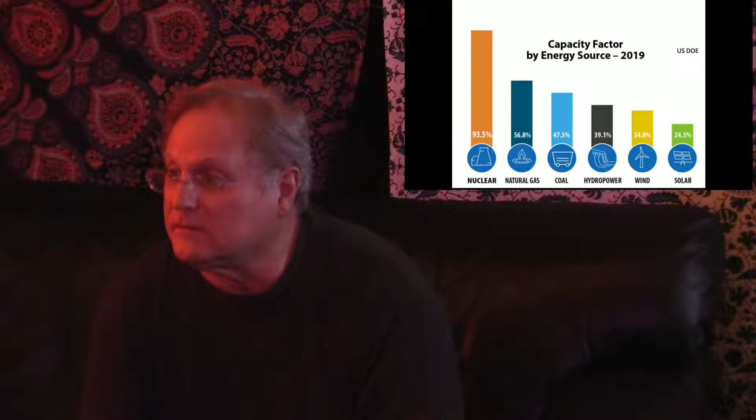So you mentioned there's only one storage dam. Is there technology to convert other dams to storage dams?

No, see, the thing is, you can't really stop the flow of the Columbia River. It's too important for many things—fish being one thing, transportation, irrigation, flood control. You really can't adjust the water behind the dams very much at all, or you mess up the whole system.

Now if you have a drought, now you're in trouble because now you don't have enough water, both to keep the temperature of the water cool enough for most of the fish up here, but also you're now suddenly not able to generate as much power during a drought. So now I'll get to why this is a problem.

Now, capacity factor is kind of bizarre. When you build a 100 megawatt wind farm, that's called the capacity. It means that when the wind is blowing between 35 and 40 miles an hour, you're getting 100 megawatts out of that wind farm. When the wind drops off, though, you're not. Or if it goes higher than that, they shut down for safety reasons.

So the capacity factor is simply the average over which that unit is producing what it's supposed to produce. In terms of the 7,100 megawatts of wind we have here, the wind actually is worse than that. The capacity factor is the annual percent of the maximum output possible. In Washington State, wind turbines only produce about 27% of the time—it's not very good.

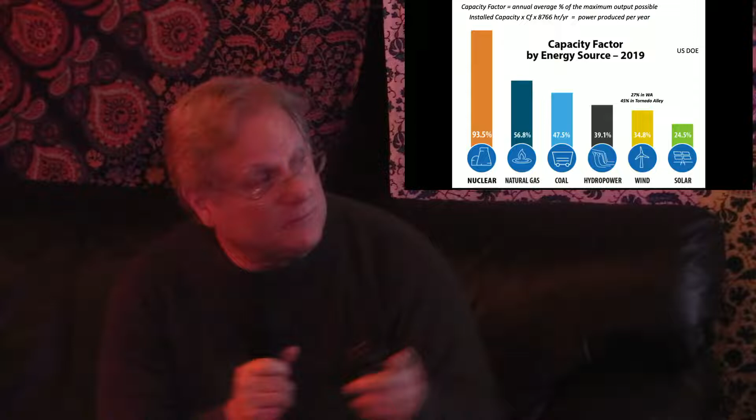In Tornado Alley, it's called Tornado Alley for a reason—even birds don't like to migrate through it because the wind is blowing all the time. So the capacity factor of the same wind turbines produces a lot more energy there.

So again, it's important to put these units in areas where they produce the most energy, so you get the biggest bang for the buck, the biggest bang for the tons of steel you're using. So you need to maximize this. You just can't put them in Washington State because you're getting a subsidy, which is the only reason why they're in Washington State. It matters where you put this.

So again, nuclear runs pretty much all the time—you only have to refuel once every 2 years. Natural gas only about 60% of the time because it is too expensive to run it more than that. Everyone says how cheap gas is, but it is not unless you run it the optimal amount of time. Coal only about 50% of the time because you're refueling all the time.

Hydropower, we only get about 40% of what it's supposed to produce because the water is used for so many things—fish, transportation, flood control, irrigation, recreation—not just to produce power. So we only use it about 40% of the time for power, and then wind and solar.

So if you want to find out what a unit is going to produce per year, you take the installed capacity—say 100 megawatts of wind—times the capacity factor, times 8,766 hours in a year, and that's how much power you're going to produce. No more, no less. Unless something really goes bad, that's what you're going to produce.

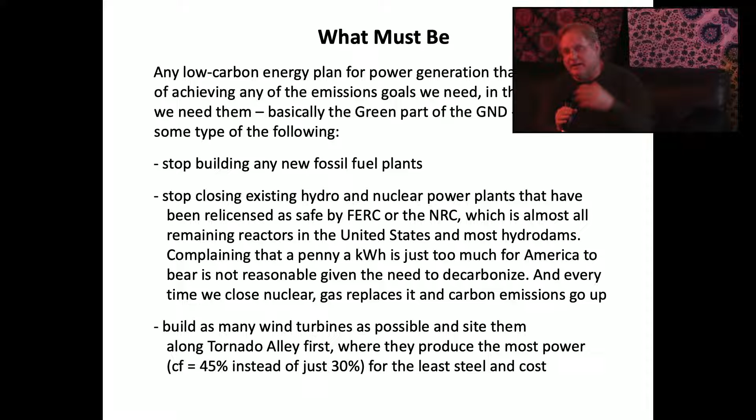Stop closing existing hydro and nuclear plants that are deemed safe by the regulatory agencies. That's why we have regulatory agencies - EPA, NRC, and FERC, the Federal Energy Regulatory Commission, which monitors dams. They actually look at the concrete. They shut down Priest Rapids Dam near me a few years ago because they found a crack in the concrete - sorry, you've got to fix that, we're not going to let you keep running.

Many other countries don't do that. They wait till the dam fails and wipes out whole villages downstream, and that has happened many times and continues to happen. So stop closing those. We don't have the luxury of closing perfectly good, safe working units and thinking you're going to actually displace sufficient fossil fuel to do anything.

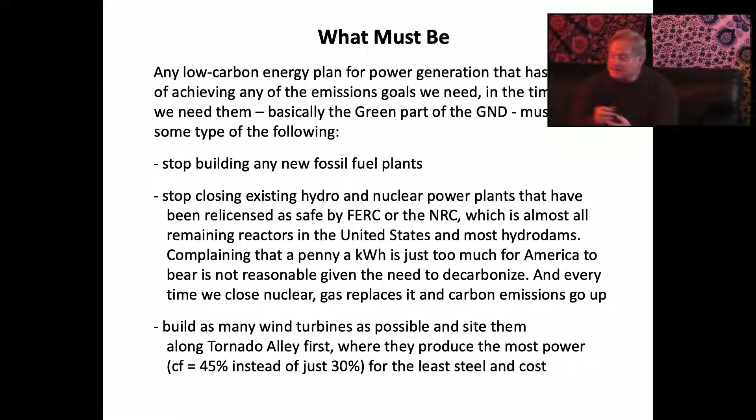And then you can use high voltage transmission lines - we do that all the time - to move it out to where it needs to be. The same thing with solar.

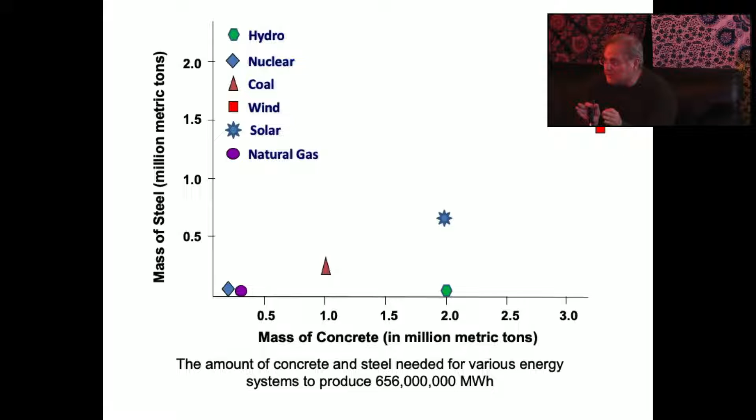This is the amount of material needed, normalized to an output. The amount of concrete and steel - concrete is the x-axis, steel in millions of metric tons is the vertical axis - needed for each of these sources to produce the same amount of energy. This is a big difference here.

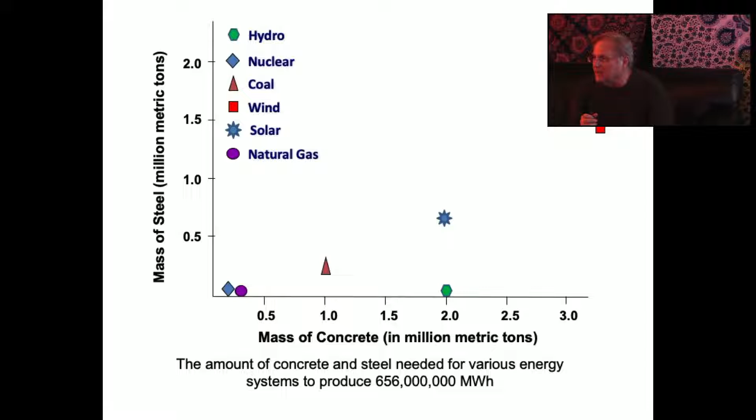That's why nuclear and gas just don't take anything. Gas, because it really literally doesn't take much to build a gas plant - you can throw it up in a year. Nuclear just runs so long, so you don't need to keep redoing it every 20 or 30 years. And of course, wind takes the most steel and the most concrete. Hydro takes a lot of concrete, but not much steel. Solar takes both. Even coal takes much more.

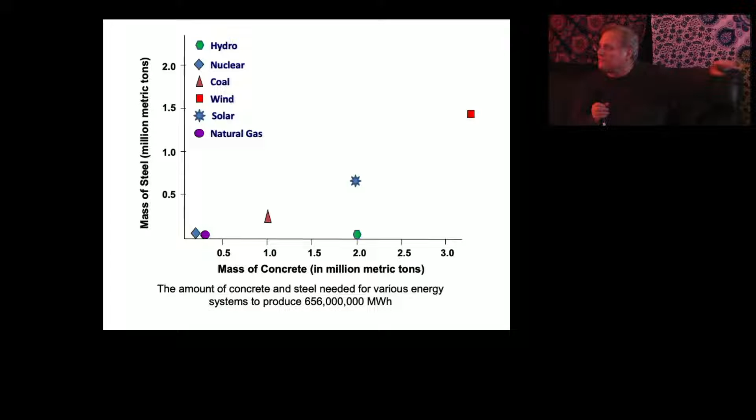So if you're going to put that much steel and concrete on the ground, you better get the most energy from it that you can, and not displace something like hydro.

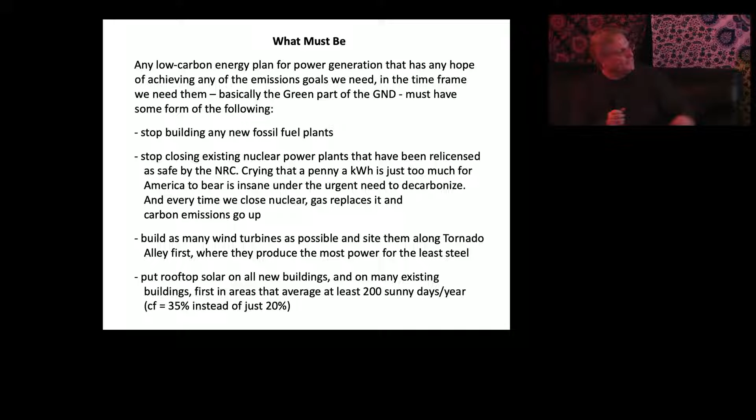And again, first in places that have at least 200 sunny days a year, not Maine. You want to put it where it's red, or at least orange. You can get away with yellow, but my solar panels don't make much here - they're 10% capacity factor. Now, if you can follow the sun like the big solar farms do, you can get that up to 20-25%. But you want to put it down in Arizona and New Mexico where you can get 35%, 40%. Of course, right? Is this a difficult concept?

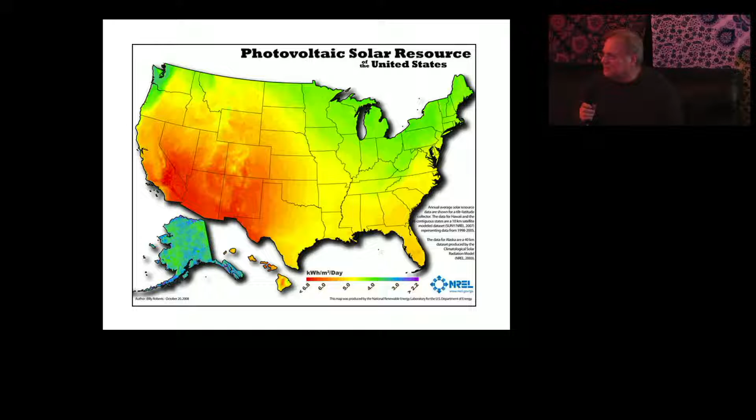No, it's not. Okay, so now small modular reactors, they're designed to load follow wind and solar. They were designed right from the beginning. And the nice thing, we have not been idle in the last 30 years. These designs are pretty good. And again, China just brought on 2 of those online. They can't melt down. I can't believe it took us this long to figure out that size matters. When you shrink the core, the surface area to volume ratio changes enough that you cannot melt down. You can bleed off heat faster than it can build up. Kind of simple. Don't know why it took us this long.

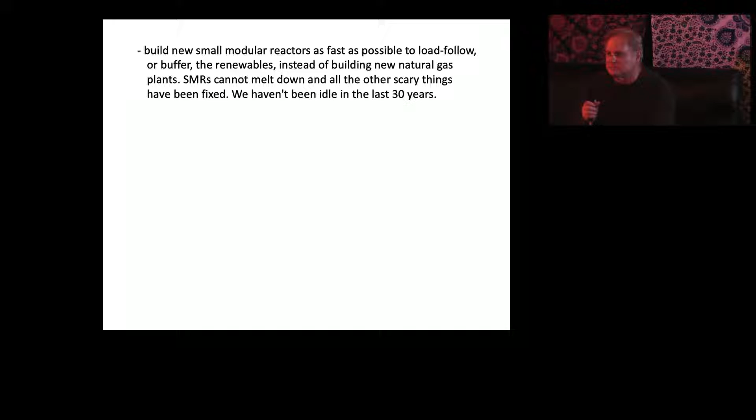Well, it didn't take it this long, because our nuclear navy does exactly this. The nuclear navy is the original small modular reactors. Every submarine we have is nuclear powered, and every aircraft carrier we have is nuclear powered. They're 1 or 2 modular systems sitting right next to each other. And we have had millions of nuclear navy personnel work on these. Never been a problem. Russia had some problems - why should I be surprised?

So there are 3 designs that are probably going to be built in Washington State, but certainly various places. X-energy's Xe-100 is a modular pebble bed reactor. It's going to be built out near where I live. Probably come on board about 2030.

TerraPower, this is Bill Gates' company. You know Bill Gates has a nuclear company? Yeah, it's really cool. I love them, they're great people. I go visit them all the time.

About 15 years ago, he talked to the foundation and said, you know, we're not doing anything in energy - why don't you do some research and figure out what we should do? And they came back and said, nuclear, no question. So he pulled $50 million out of his back pocket - actually not the foundation, his back pocket - and told them to hire the 40 best nuclear scientists they could find. And they did, and it's brilliant.

Now that one is going to go into Wyoming, in the same site as a coal plant that's retired, because it can take advantage of the existing infrastructure - the high voltage transmission lines, even the turbines. I mean, all you're doing in coal, gas, and nuclear is heating water to steam to turn a turbine. That's all you're doing, okay?

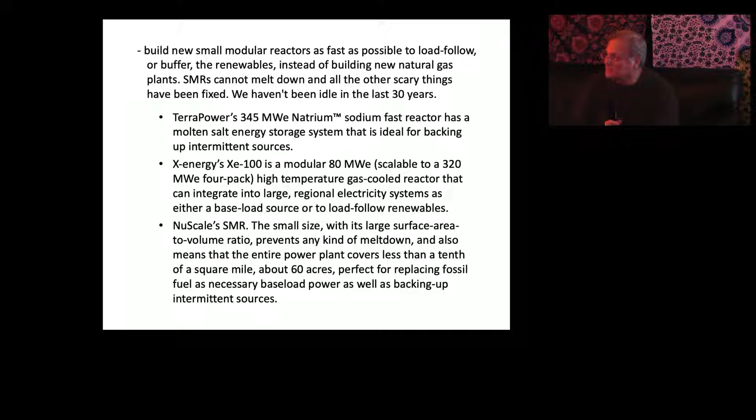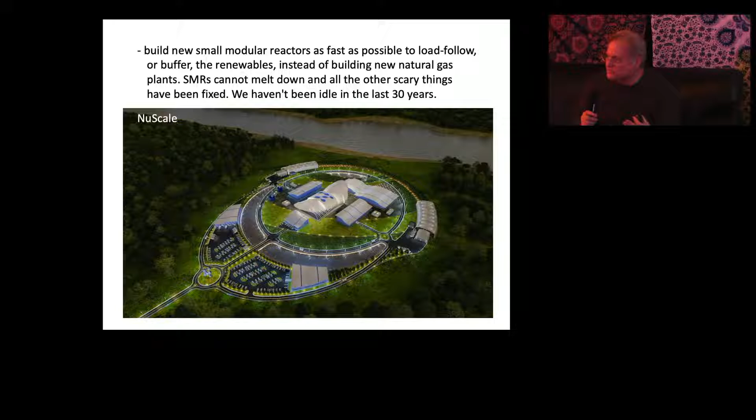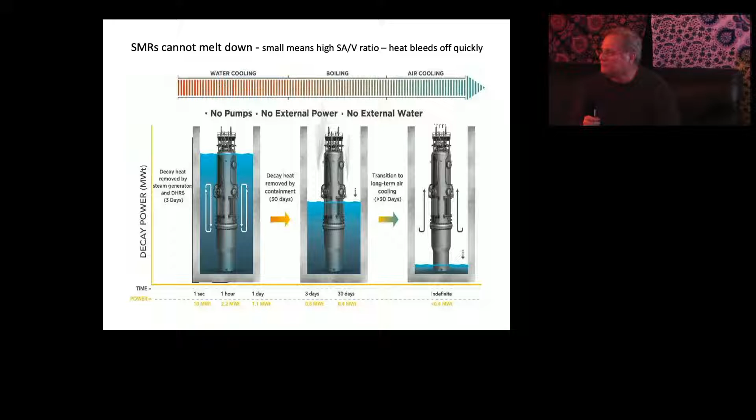Now, NuScale out of Oregon, out of Corvallis, brilliant. It's just a shrunk down light water reactor. It's great. Jose Reyes is brilliant, so this is their design, and that's it. And most of these are also below grade, so again you get another heat sink. So you just can't melt these things down. If you lose power, you lose water, everything goes awry - all it does is just cool off, and that's it. Cannot melt down.

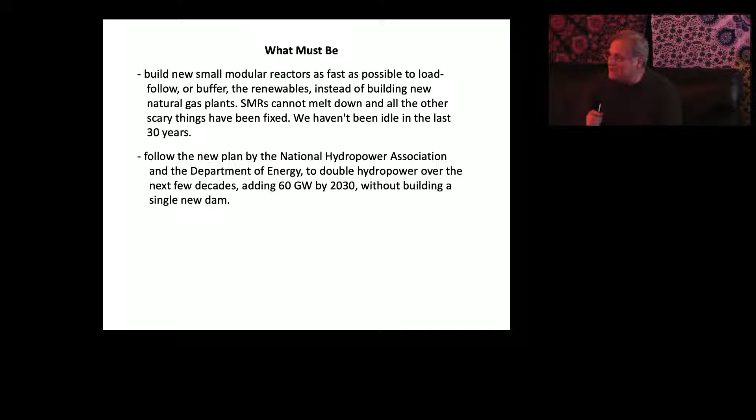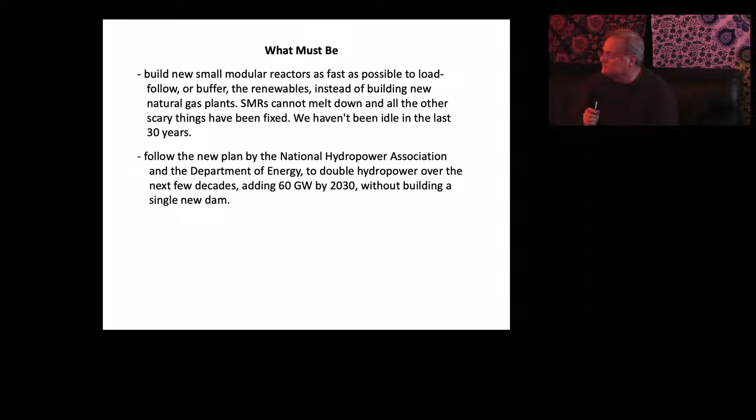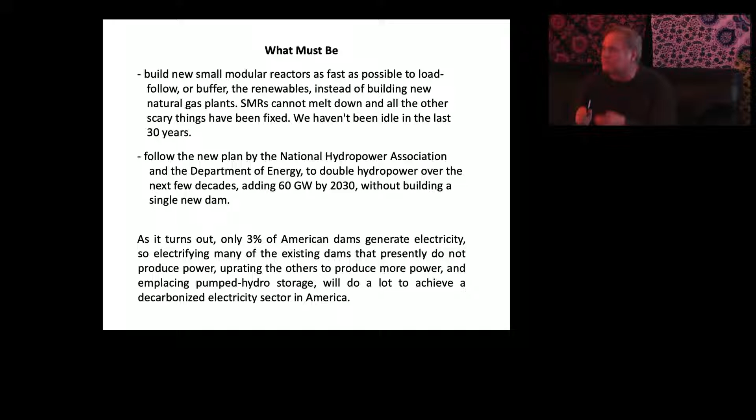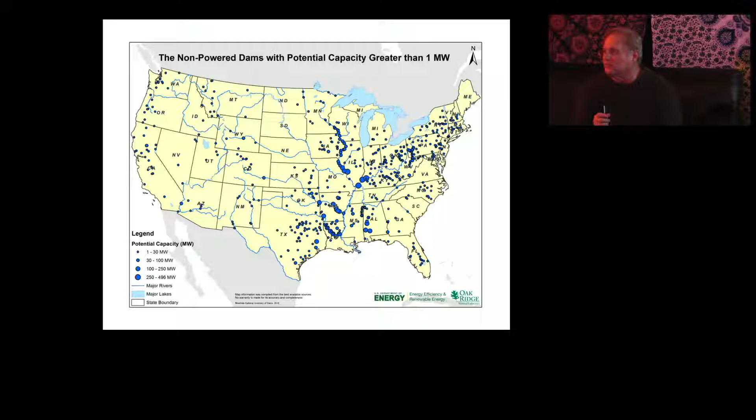Now, the National Hydropower Association and the Department of Energy have a plan, and this is the lowest hanging fruit in America - to double hydro without building a single new dam. It turns out only 3% of our dams are electrified. 97% of the dams that exist don't produce power. So you could do that easily without building a new dam, just powering it, uprating it. And these are the ones that are best for that. The nice thing is, see the ones that are near Tornado Alley - you need those to buffer the wind in Tornado Alley. So again, we can double hydro energy in America without building a single new dam. Very easy. It is the lowest hanging fruit.

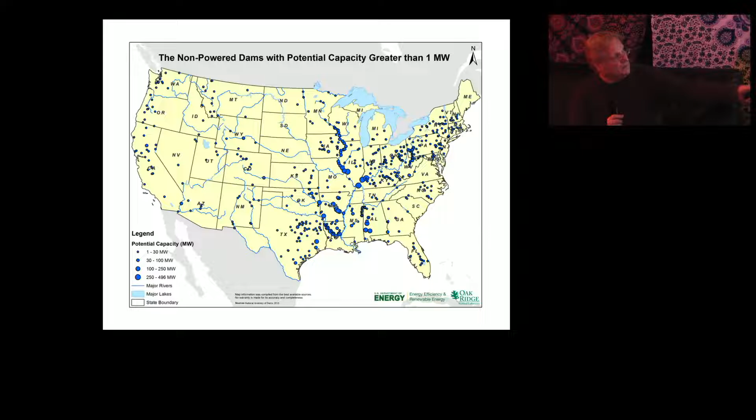In Washington State, we have 1,100 dams, and only 38 of them are electrified, and we are the highest average of anyone.

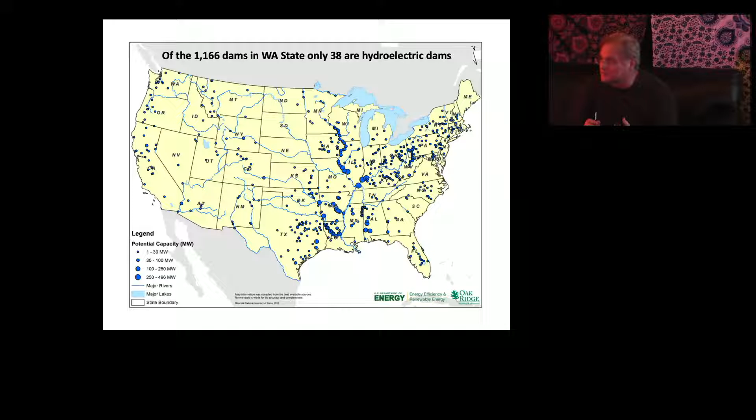So again, secure sources of metals. We need these metals. We do not have enough lithium, cobalt, iron, or steel even, and we need to do that. You cannot come up with a green energy revolution without these materials. Just forget it. Copper turns out to be probably the most rate-limiting step.

You need to build, for the United States, 300 million fully electric vehicles by 2040. That is a big lift. Okay, but you're not going to.

Did I not turn off my phone? I'm sorry. That is... I'll call you back.

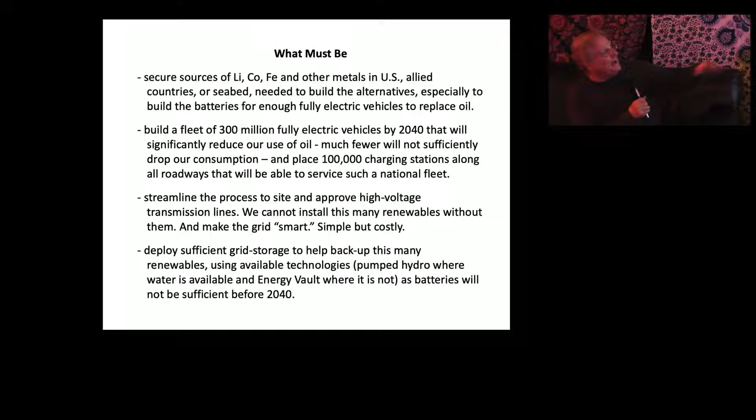Sorry. You are not going to replace petroleum without replacing most of the internal combustion engines. Now, there's 300 million we need in the United States. The world, we need 3 billion. All right, and that's going to be tough.

We need to streamline the process of approving high voltage transmission lines and nuclear and hydro and pumped hydro storage and whatever else. We can't take 10 years to license something. We don't have the time.

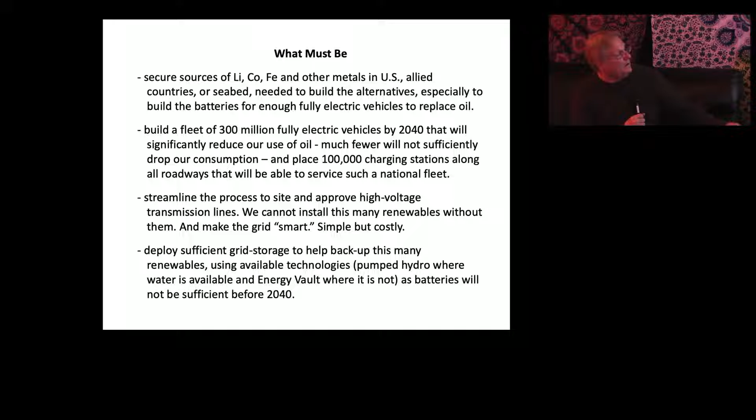And we need grid storage backup. Okay, now, what about storage? All right, so grid scale batteries, we're not going to do it. We don't have the materials. Now, we have some things in the works, but things that are in the works are at least 10 years from actually being in the field, so we don't have that.

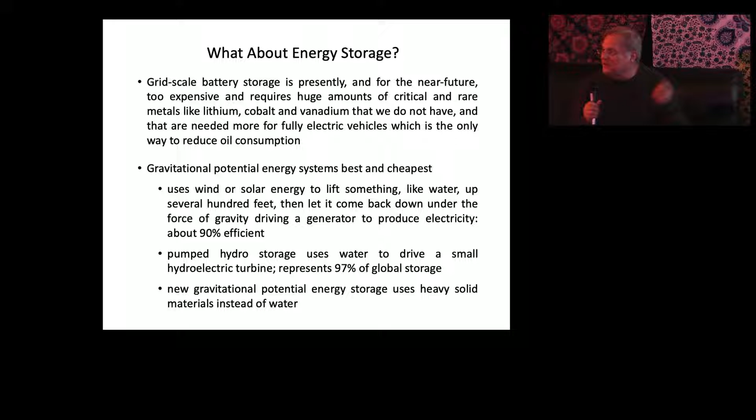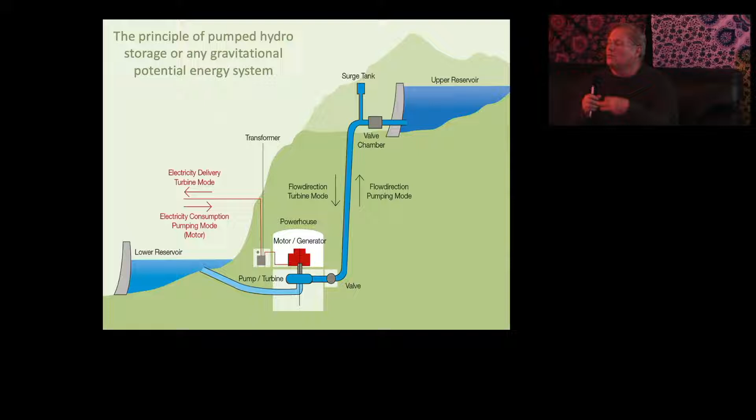What we do have is gravitational potential energy. Pumped hydro storage, have you heard of that? Good segue. So, pumped hydro storage is you build two reservoirs, one about 300 feet above the lower one, and when you have excess wind and solar, which is whenever they're producing, you pump water up into the upper reservoir. When you need that energy, you let it out and it drives a hydroelectric plant just like a hydroelectric dam.

It is brilliant. 97% of the grid energy storage in the world is pumped hydro. Right? Now, it's brilliant, doesn't take much space. The evaporation rate is actually quite small. But every time we propose one in Washington State along the Columbia River, everyone shoots it down. The tribes, everyone. It's like, what are you shooting this down? This is nothing. The environmental impact here is nothing compared to everything else you could do. But yeah, so we're not doing this.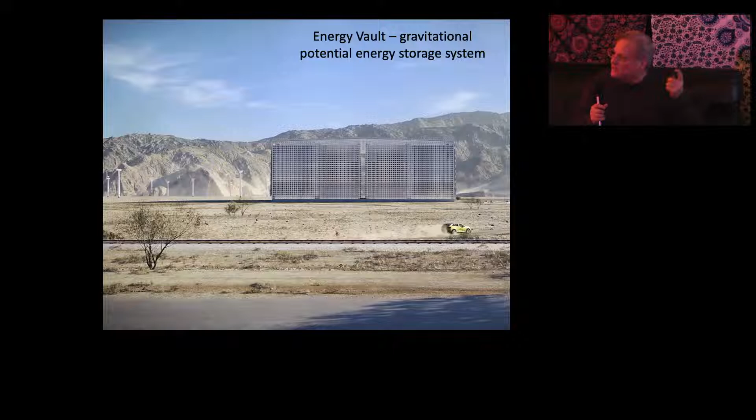It's very nice. Now, what if you don't have water? What if you're in a desert? Well, okay, there's something called the energy vault, which again, instead of lifting water up 300 feet, it lifts 35-ton bricks up 300 feet using excess wind and solar. So when you need that energy, you just let these bricks drop, and they actually drive a generator. It's brilliant. Don't need water, very, very cheap, very low maintenance.

And the bricks are green. They're not even concrete. They're actually green materials with green polymers. It's really kind of neat. One area, they use shredded wind turbine blades that they stick together and make into these bricks.

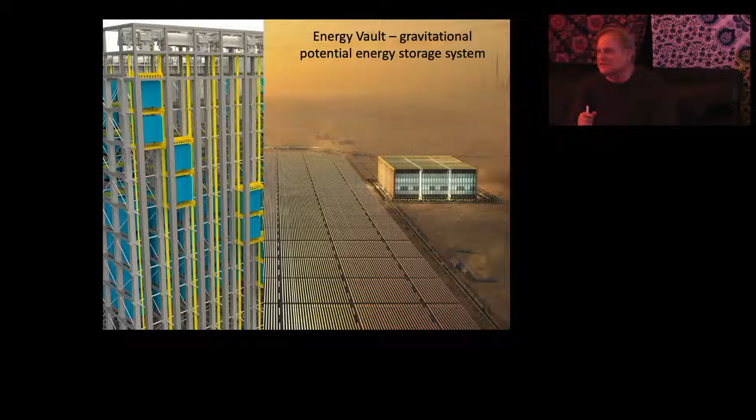All right, now, in the United States, it's going to take 1 billion tons of steel. How much steel do we produce here? About 160 million tons a year. Globally, we're going to need about 10 billion tons of steel, but we only produce about 1 billion tons of steel globally. So we're going to have to adjust this. We're going to have to deal with this. You just can't snap your fingers and say we're going to build all this stuff. Where are you going to get the steel? You're going to have to quadruple the amount of steel mines in the world. That's going to go over big.

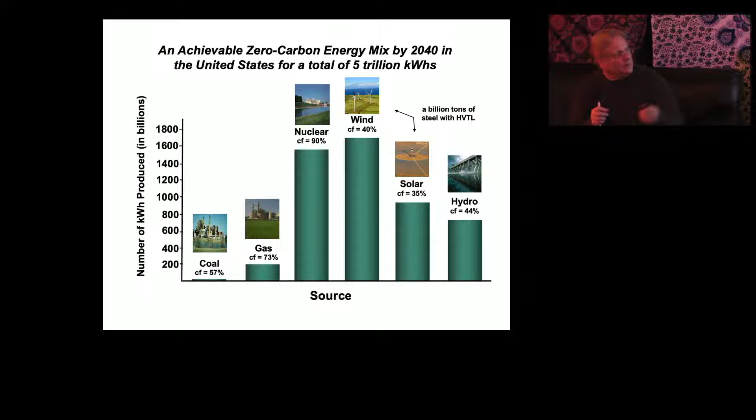Okay, so in America, this low carbon mix, some form, don't get me on this, doesn't have to be exact, but some form of this: about 500,000 new megawatts of wind, 200,000 new megawatts of nuclear. Now this includes backup, pump hydro storage, 300,000 new megawatts of solar, 120,000 new megawatts of hydro. Don't even have to build a single new dam. And this will cost about $9 trillion, of which capital is $4 trillion.

Now that sounds like a lot of money? It is not, actually. It is exactly what we spend now for the same amount of power. If you do business as usual, it's going to cost you $9 trillion, but only $1.7 trillion in capital, because the rest is going to go to buying fossil fuel. So business as usual, most of the money goes to buying fossil fuel because we're dominated by fossil fuel. So this way, you're spending the same amount of money, but now you're actually building things out of steel and concrete, not buying gas and coal to go up the stacks.

Right? So it doesn't cost any more, but when you have this much capital, you're telling the public, you got to pay up front for savings later. Who likes that? No one likes that. Okay, so trust us, give us $9 trillion, and you'll save later. So this is the problem. No one wants to invest up front, but you have to invest up front. This is called infrastructure.

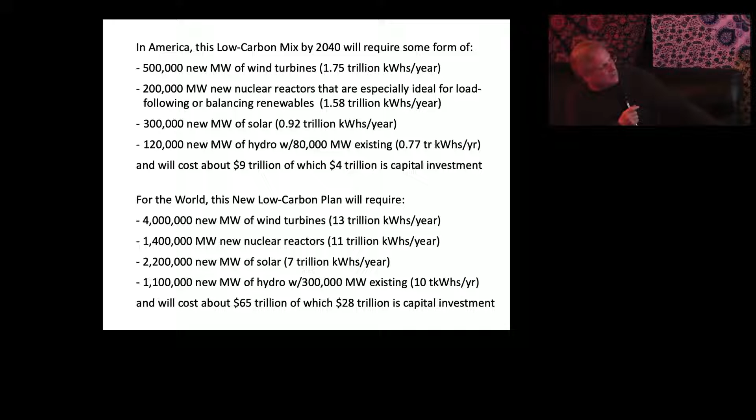So for the world, same kind of thing: 4 million new megawatts of wind, 1.4 million new megawatts of nuclear, 2.2 million new megawatts of solar, 1.1 million of hydro. It will cost 65 trillion, of which 28 trillion is capital. And who is going to put up that capital? It's not going to be Bangladesh, right? It's going to be United States, European Union, or China. That's it. We're the only ones with the bucks.

Already showed that. I just want to end with this. This is an interesting report that just came out by this geometallurgist. He's determined that copper is the rate-limiting step in all of this. So throughout all of human history, we have only mined 700 million tons of copper, total. Now, if we do business as usual, in the next 20 years, we're going to need another 700 million tons of copper without changing anything.

But if we want to go green, we're going to need 4.2 billion tons of copper. And we've played out all the good copper grade ores. They're gone. So now we're going deeper, to the lousy grades that are only 2 or 3% instead of 20%. It takes more energy, takes more time, makes more waste. So this is not a trivial thing.

And then, of course, we're going to have to electrify these fleets of humongous trucks. They are really humongous. These are big vehicles. So if you think of electrifying these kinds of vehicles, that's another trick. The devils are in the detail. It's important how you do that. You just can't say, we're going to electrify everything.

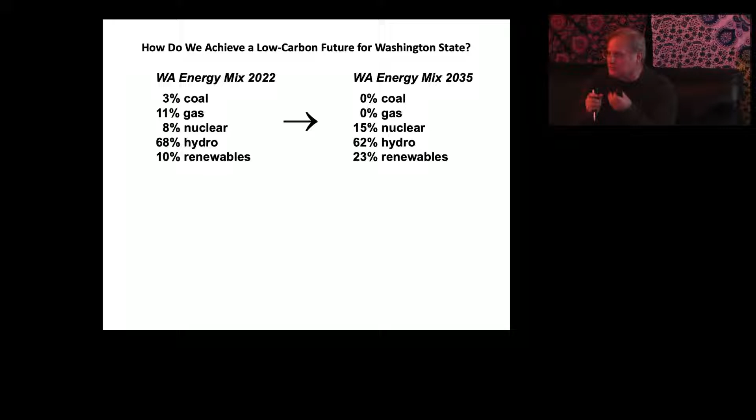Double nuclear with small modular reactors, and double or even triple renewables, but you have to have the backup for them. Right now we are at 92 terawatt hours in the state of Washington, and we have almost no grid scale storage and only 17,000 electric vehicles. We're going to about 115 terawatt hours in 2035. We need 15 grid scale pumped hydro storage units to make that wind useful, and over 2.5 million electric vehicles needing an additional 7 terawatt hours in order to get rid of petroleum. And that's our biggest carbon footprint, is petroleum, is gas and diesel. That's our biggest footprint in the state of Washington.

This mix will cost Washington state about $200 billion, of which $100 billion is capital. That's actually doable. Now this is over 13 or more years, so 20 billion a year, 10 billion in capital. That's tough, but it's going to cost the same to keep where we are now.

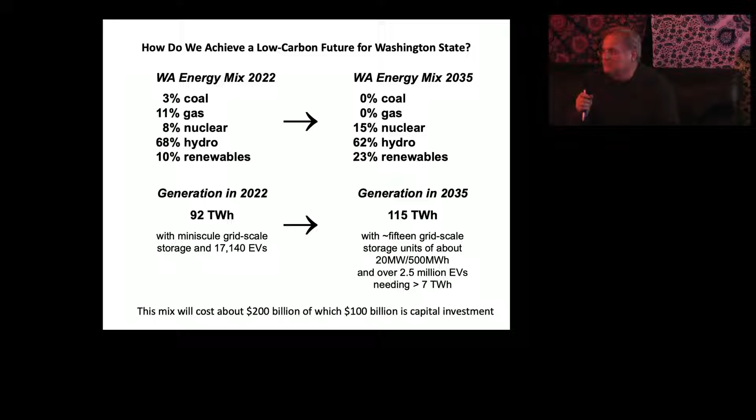You want to take a break? You want me to keep talking? What? Questions?

Can you hear me now? Yes. I know you're trying to be fair and balanced.

It would be interesting to see what the amount of copper and cost would be if you just went straight nuclear. Yeah, that would be the best thing to do. We should have been doing that since 1973, the oil embargo of 1973.

I remember, because I had just started driving and I was paying 32 cents a gallon. And then overnight it went up to $1.14, and I was really pissed. But that was the oil embargo.

And France decided, well, they're not going to be dependent on the rest of the world, so they started building 50 nuclear power plants, which they built in 15 years. Perfect, it's great. We started as well, and then Three Mile Island happened, which was nothing. I mean, that was an industrial accident. It did absolutely nothing, but it freaked everyone out.

And then Chernobyl, of course, which is a whole other story. I mean, the Soviets—Chernobyl was a weapons reactor. Did you know that? Yeah, it was. No containment vessel. I mean, it's the Soviets, it's the Russians, it's the same thing.

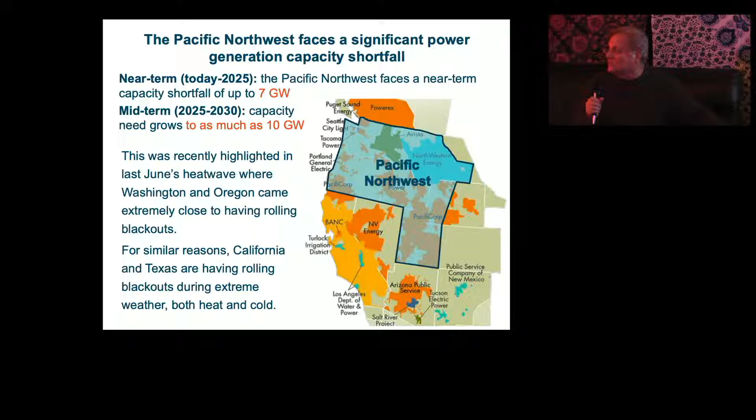So we are facing some major shortfalls, and the same thing happened in California and in Texas — the exact same thing — and they've been suffering with blackouts and major deaths as a result of this. Now, I mentioned the CETA Act of 2019, so we have to be carbon neutral by 2030.

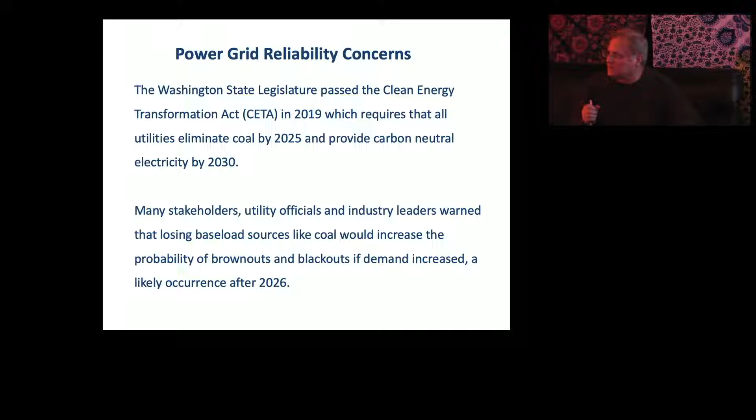Okay, fine. These are the coal plants in the Pacific Northwest that are closing, and this is the time scale on which they're closing. We've closed half of the coal plants in the Pacific Northwest, which is pretty awesome — I was kind of surprised. And that totals about 6 gigawatts.

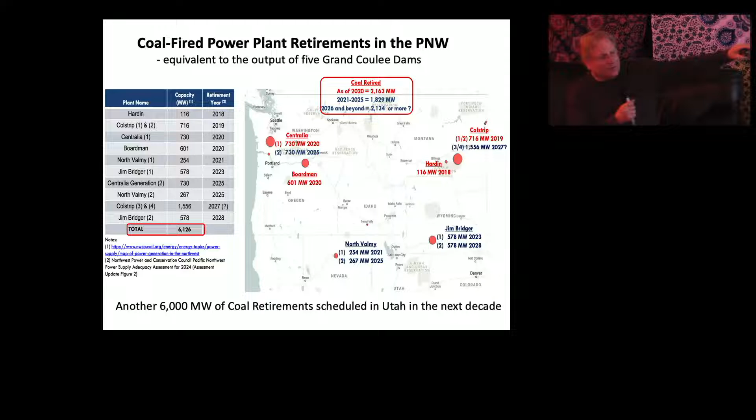Now, there's another 6 gigawatts retiring in Utah. So that's 12 gigawatts of coal gone. What are we replacing it with? The plan was to replace it with natural gas. That was the plan, and it takes a decade to plan this kind of stuff.

And then in 2019, the CETA Act wiped that out. So now we have no plan to replace this. We're simply going to lose it, and there's no plan to replace it. What do you think is going to happen?

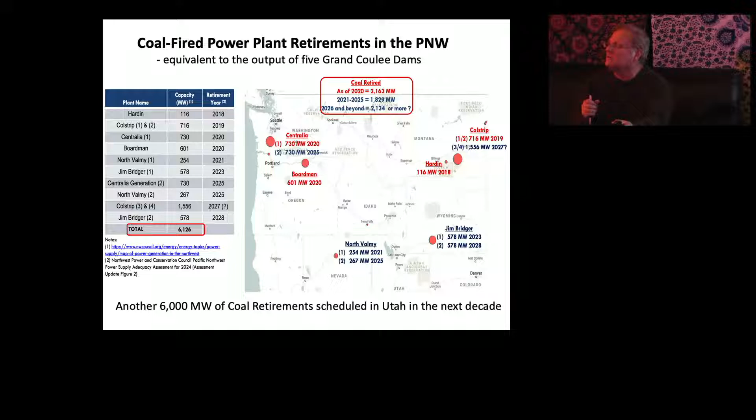Well, if you talk to the Northwest Power Pool, which is what our legislatures talk to, they say, well, for the last 40 years, the Pacific Northwest has had less than a 5% risk of blackouts. We just don't have blackouts here because we have so much hydro and we can load-follow so well with it, so we never have any problem. However, by 2025, because of all these coal plant shutdowns, we're going to raise that risk to 26%. So after 2025, Pacific Northwest will have a quarter of the time risk of blackouts.

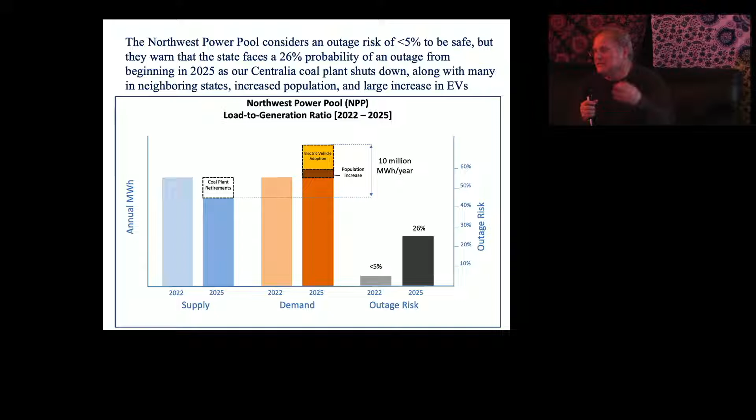Now this means you will have blackouts — it's just a matter of when. Well, of course, when it's really hot or really cold, that's when you have blackouts, right? That's when you stress the grid. So last summer, we came very, very close to blackouts. I'm sorry — 2021, Pacific Northwest came this close to having rolling blackouts because we had no snowpack in the spring. Now, this last summer got really hot, but we had no risk of blackouts because we had a huge snowpack in the spring. So we were good for this year.

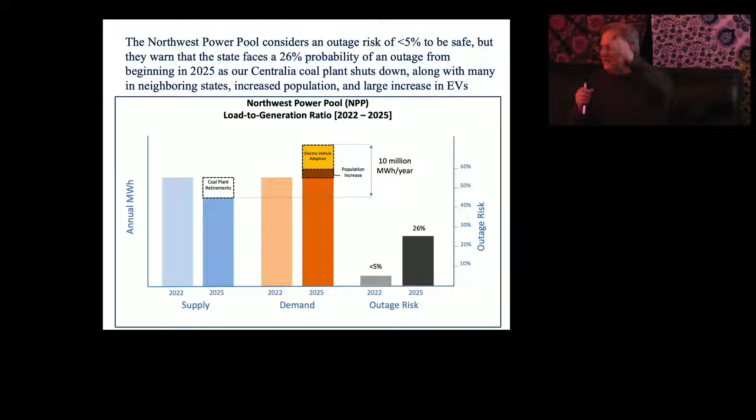Now, it's the same as with ERCOT, the Texas grid. They installed so much wind without sufficient backup that when they had this really cold spell — because the wind doesn't blow when it's really hot or really cold, that's what happens, it just doesn't blow — when it got really cold, they did not have enough gas to back up the loss of that much wind, and they had rolling blackouts that killed about 200 people and caused about $3 billion worth of damage overnight. This is why we have reliable grids. We've always had reliable grids in the United States, but now we're disrupting that because we seem to be jumping off this cliff without any real plan for how we're going to adjust.

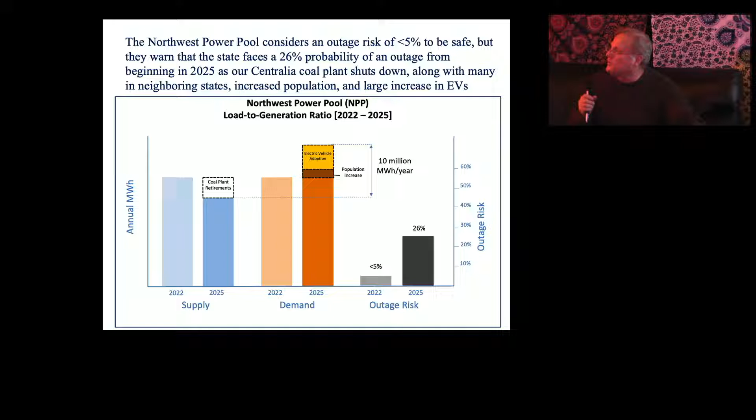By 2030, we will be ERCOT.

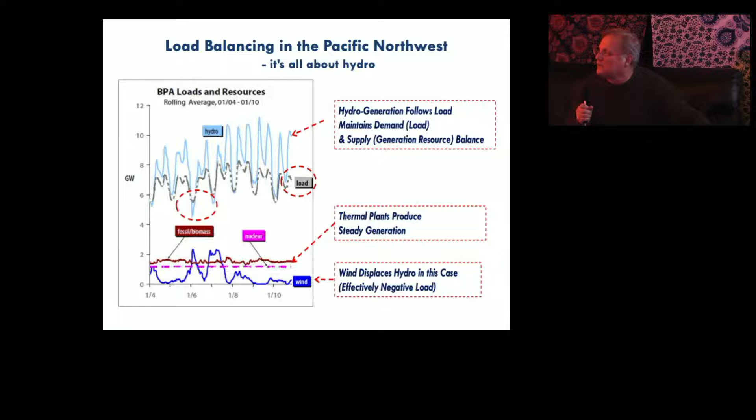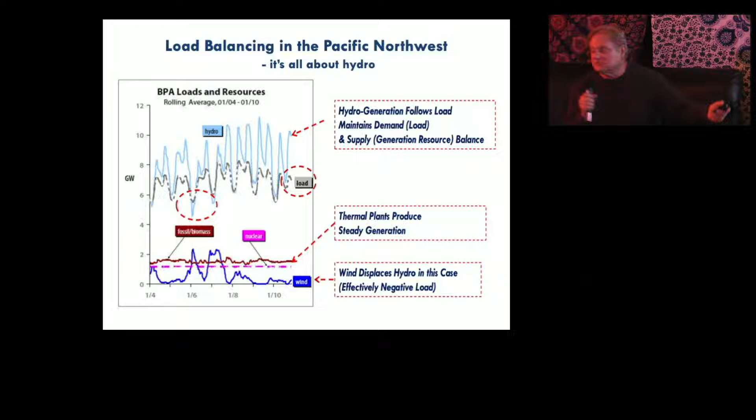Okay, so now this is even worse, because according to the recent E3 Northwest Resource Adequacy Study, which we do every other year, all the utilities and regional transmission operators get together and ask: do we have enough resources for the next 10 years? Usually the answer has been yes, but now it's not.

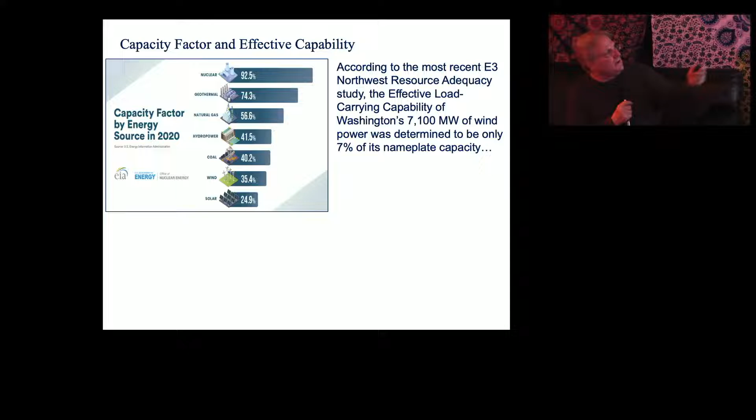Of our 7,100 megawatts of wind that we have here, you can only depend on 500 megawatts of that 7,100 at any one time. When the wind's blowing great and the weather's wonderful, sure, we have all the power we need. That's not when we need it. When it's really hot or really cold, you can only depend on 7% of it. So the capacity factor isn't even 35% for wind, it's actually 7% when you need it, because when you don't need it, who cares? And that's not when you want all this energy.

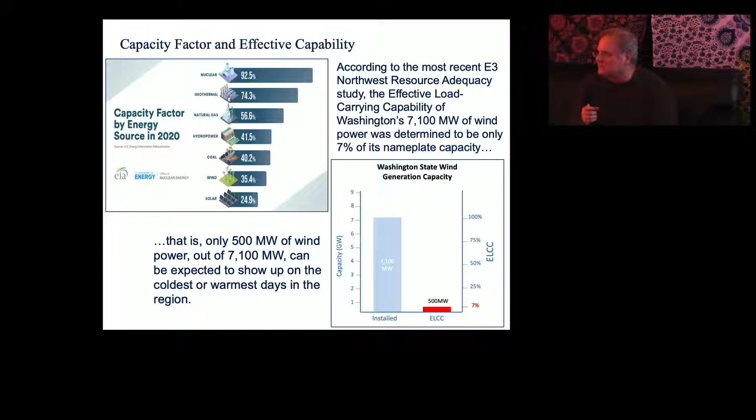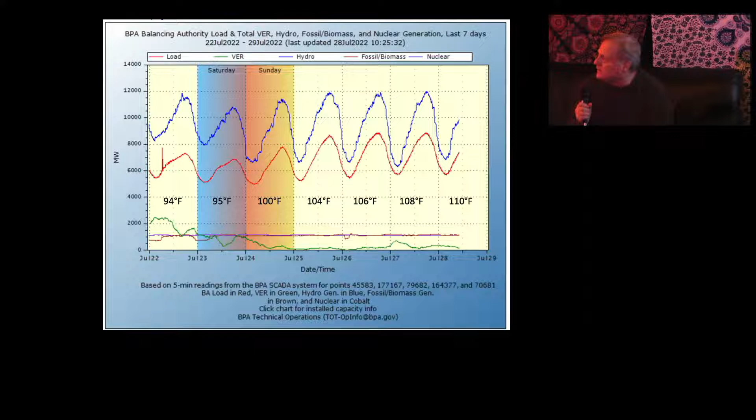You can't depend on this. When it's really cold and really hot, you better have energy or you're going to have people freezing or dying from the heat. It's not nice. Texas and California have been experiencing this. Fortunately, they've been buying energy from other states. Well, we can't buy energy from other states because they're closing their coal plants even more than us, since they have a lot more coal than we do. So we're all closing our coal plants with nothing to replace it. Get ready, I guess buy diesel generators for your home. I don't know what to do.

Hi, I missed part of the talk, so you might have already mentioned this, but what about innovations in power transmission, like high voltage DC and stuff like that? Couldn't you have a grid based on wind where if wind's not blowing in one place, it's going to be blowing in other places?

So again, yeah, we can do this. If we have enough fully electric vehicles, you can do that. Shanghai, if you go to Shanghai, they have enough fully electric vehicles. When you come home and park your electric vehicle in your garage and plug it in, you have to type in when you want that car charged, when you need it charged. Everyone does that, and the grid actually uses 100,000 EVs as a battery, as long as your car is charged when you need it. It's really brilliant, but that takes a smart grid.

Okay, so this is where grid scale storage counts. If you want to make wind useful in the Pacific Northwest, you better build several pumped hydro storage facilities, or it's going to continue to be useless to us when we need it.

Want to talk about costs? Everyone worries about costs. It's not the issue you think it is at all. In fact, when we talk about costs, think about this: are costs sufficiently different between the sources to justify unethical decisions? If it's just going to cost a penny more per kilowatt hour, come on. You're not going to pay a penny more to save the world? Really? That's a penny too far? Okay, so you need to think.

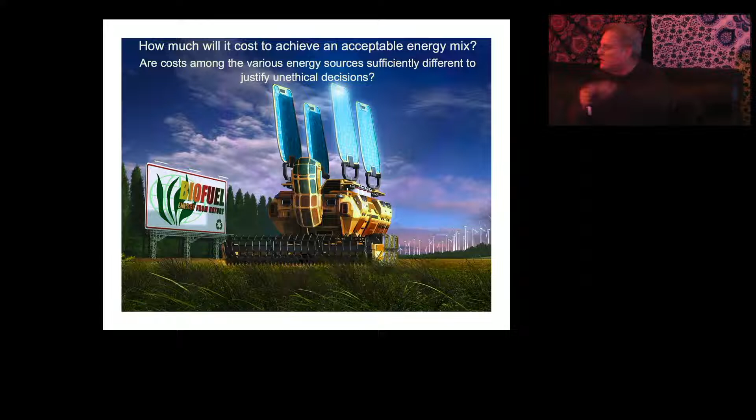It has to be way more expensive or way less expensive in order to justify it on cost. Because we're not supposed to be deciding these things merely on cost, or else we'd be a natural gas nation, period, 100%, right? So energy has never been cheaper than it is today.

In all of human history, it's never been cheaper than it is today. And as a result, food has never been cheaper than it is today, because it's tied to energy. Now, of course, it really got a lot cheaper as a function of GDP after 1850, when coal came on board. And you can see the 1973 oil embargo peak there. It's kind of interesting.

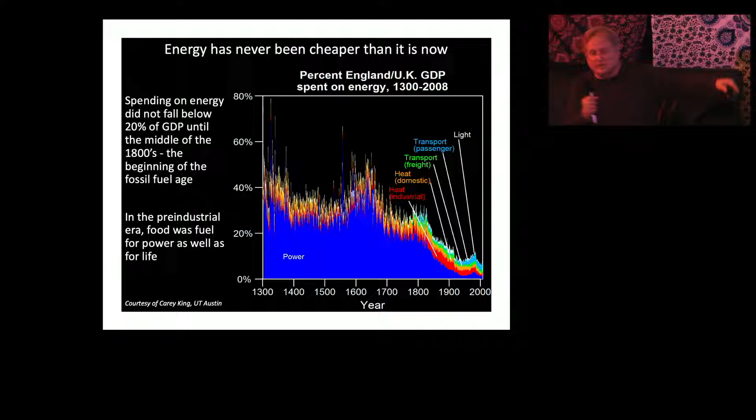This is from the Northwest Integrated Resource Plan that our legislature uses to make decisions about this kind of stuff. This is the latest one. This is called LCOE, Levelized Cost of Energy, and I hate LCOE because it does not include the indirect costs, and it includes stupid things like loan depreciation. That's an arbitrary thing, okay, but whatever.

So you can see right away, though, that those four middle ones, they're all within a penny of the average, all right? So again, is it really that important to squeeze another penny out of everyone? I mean, it's America, you're going to make a buck, I get that. But you don't have to fleece everyone, every penny that they own. So you shouldn't be making this decision on cost. Otherwise you just go with natural gas, right?

Of course, you just go with natural gas. But we're not. We're supposed to be making decisions based on other things like the planet, our survival, things like that. Now, coal and hydro actually is more costly.

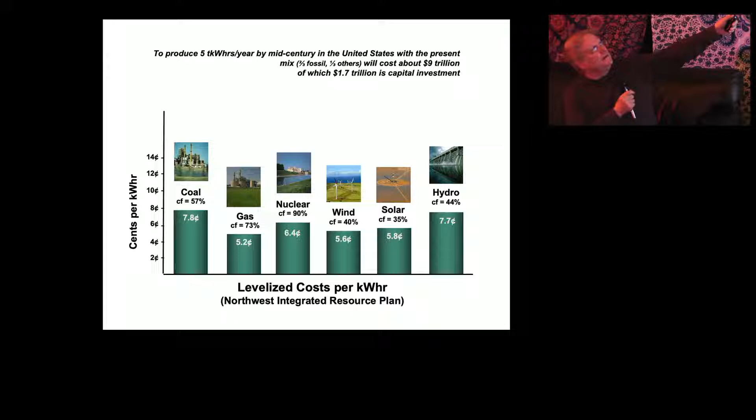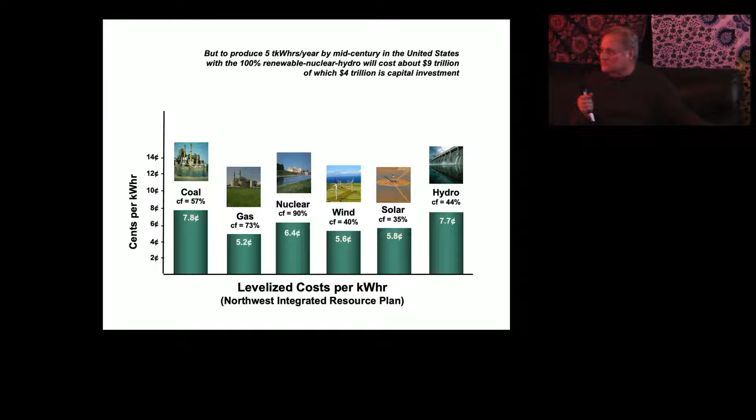However, this is just direct costs. There's a bunch of, using this cost estimate then, what are these going to cost? What's the Green New Deal going to cost? In the United States, the present mix of fossil fuel, the present mix that we have now, between now and 2050 is going to cost about $9 trillion, like I mentioned, and 1.7 is capital. So this is business as usual, right? Now, but to produce this 100% renewable nuclear hydro mix, this non-fossil fuel mix, but includes everything else, will cost about $9 trillion. But $4 trillion is capital investment, all right?

Now, getting rid of fossil fuel will save the healthcare costs of America about $4 trillion, right? Because coal has a huge upper respiratory effect, same in oil and things like that. So again, we actually, the Canadians did a really nice study about this. So just the cost savings alone on the healthcare system will more than pay for the capital. This is actually worthwhile. But again, you don't get these benefits for a while.

Now, if you do a renewable-only mix like Stanford talks about, which is really stupid, it's going to cost you $20 trillion, okay, and 16 trillion is capital. Well, we're not going to do that. I mean, there's no way we're going to do that. It just costs too much. And again, you'd still get the healthcare savings, but it would not be enough to offset the increased cost. For the world, we're talking about 65 trillion and 28 trillion in capital.

Now, that being said, LCOE does not include indirect costs. And a lot of those indirect costs are integration into the grid. There's something called a congestion fee. Did you know that? When electricity comes onto the grid, if it's too congested, if you're trying to put more energy on it, you get charged for that. It's a congestion fee, nothing to do with anything. It's kind of bizarre. So, and if you're wind farms, then you have to have backup something.

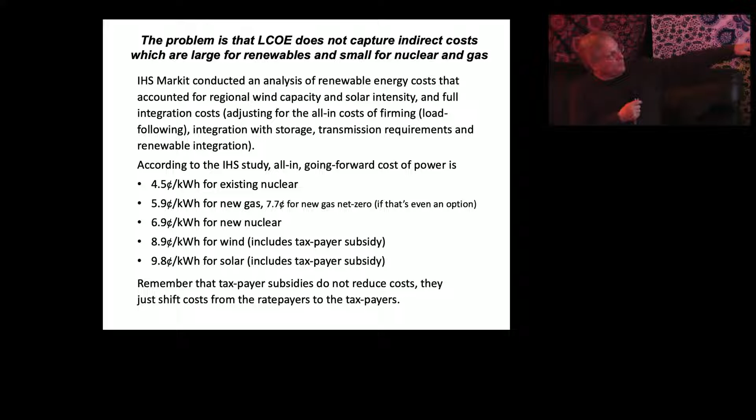For wind and solar, it's actually significantly more expensive because you have to pay for this backup, and you have to pay for integration onto the grid. You have to pay for more high voltage transmission lines.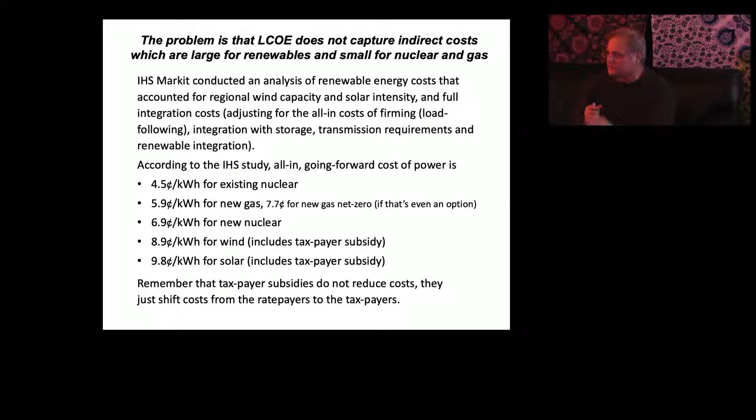And you got to remember, taxpayer subsidies do not change the cost, they change the price. It just shifts the cost from the ratepayer to the taxpayer. And when that happens, you have no idea what the hell your taxes are going for anyway. So you're lost - you think it's cheap, but it's not. We're paying for it in our taxes. We're paying for it one way or another.

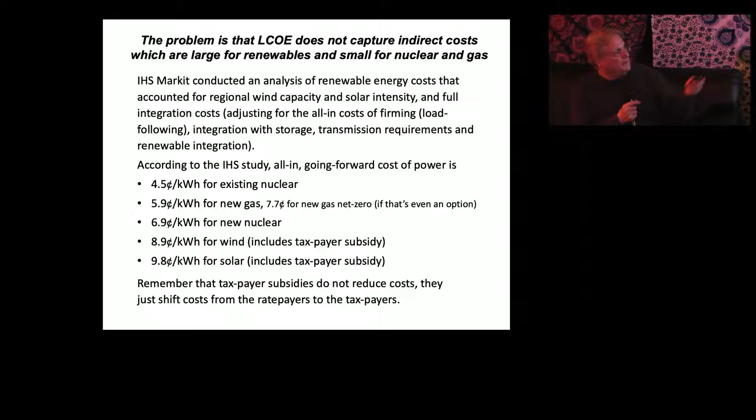And then there's the other indirect costs, and I'm going to end with the next few slides. But you got to see these - they're funny, well, death being funny I guess. But we don't know how to capture these indirect costs. We don't know what is the cost of the carbon footprint.

Okay, well, let's put a carbon tax of $15 a ton of CO2 emitted, let's just throw that out there. And I've shown what that will do to the price of each of those. So of course fossil fuels are all about carbon, so they go up a bit. The carbon footprint here, grams of CO2 per kilowatt hour - yeah, fossil fuel has a very large carbon footprint, of course you'd think so. It's not zero with the others, but it's significantly lower.

And hydro - most of that CO2 comes from cement and also the methane emissions from the back pools behind the dams. Solar, it's organic solvents, a huge amount needed to make solar. Wind and nuclear, it's simply mining and construction - cement, mining for iron, things like that.

And then area - now we don't know what to assign as a cost of a square mile, taking a pristine square mile and doing something with it, like building wind turbines or a nuclear plant on it. But the Europeans came up with $100 an acre, just picked it out of the air - I don't know how they came up with that, but we can assign that too. For fossil fuels, not much area needed, including drilling and everything else. For the renewables, yeah, now you're getting into significant physical footprint, and of course nuclear is neither.

So then there's the death print, okay? And no one ever talks about the death print. Coal kills so many people, you gotta push that aside because it just blocks everything. So coal is the killer, really - if you need an evil, it's evil, but whatever.

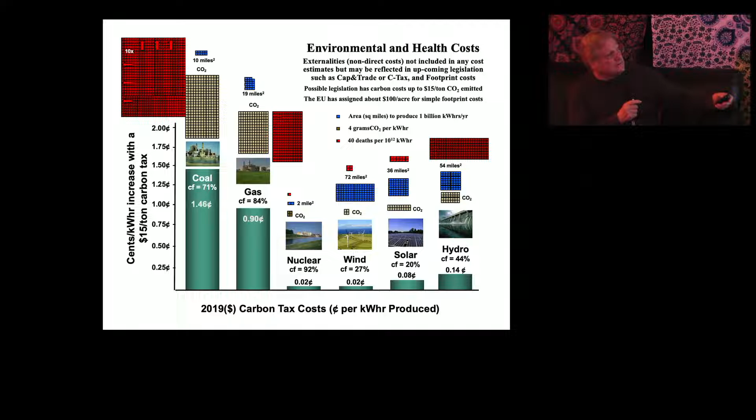Natural gas still kills a lot of people, not that many. Hydro - now these are global numbers - kills people because of dam failures, not in the US, but elsewhere. Then solar, wind, and nuclear, this is simply accidents - falling off rooftops, falling off wind turbines, falling off scaffolding at a nuclear plant while you're painting. It has nothing to do with the actual source of the energy, simply industrial accidents. And nuclear is even safer than all the others because you're always very careful at a nuclear power plant - everyone's afraid of everything all the time, so everything is done correctly.

So here's the numbers, the mortality rate, the death print - deaths per trillion kilowatt hours, you have to normalize it. Now coal, wow, yeah, of course it kills a lot of people every year. China's getting better - a few years ago that was 250,000 per trillion kilowatt hours, but they're cleaning up their act. United States, only 10,000.

That should get a snigger because 10,000 is not acceptable, but okay. At least it's not 100,000.

Then natural gas, biomass. The World Health Organization recently determined that biomass was an epidemic in the third world, deaths from biomass, because of poor ventilation. Wind and solar, again, these are just simply accidents.

Nuclear, and that 40 for the global average includes worst case numbers for Chernobyl, which were not as bad as you think, but we'll just throw in a bunch more deaths just to be nice. And what you see, though, there are three categories, coal, hydro, and nuclear, that I have a global average and a U.S. average. Why is the U.S. average so much lower? Why do we kill so few people compared to everyone else?

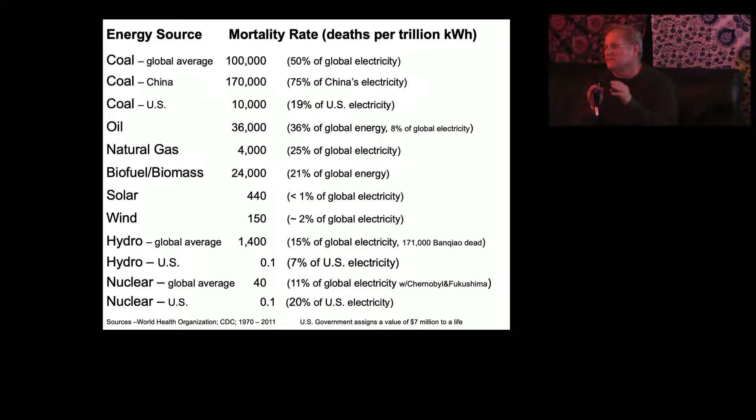Regulation. Yep. So the reason coal doesn't kill so many people in the United States is because of the Clean Air Act. Arguably, the single piece of legislation that saved the most lives in the history of humanity is the Clean Air Act. Now, I've been given some grief because the 1938 Fair Labor Standards Act, which got rid of child labor and gave us the weekend, the 5-day work week, that saved a lot of people too.

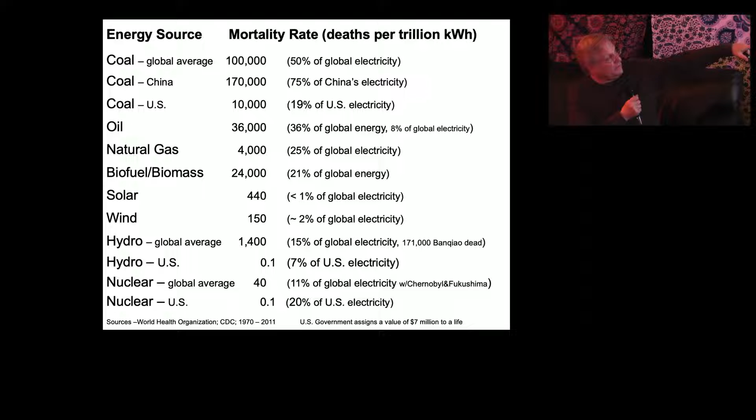But I still maintain the Clean Air Act is the one that saved the most. Now, hydro. Yes, we are close. I've gotten to the deaths. The deaths are what's important, right? So hydro kills so few people because of FERC, the Federal Energy Regulatory Commission. They inspect dams and they will shut you down.

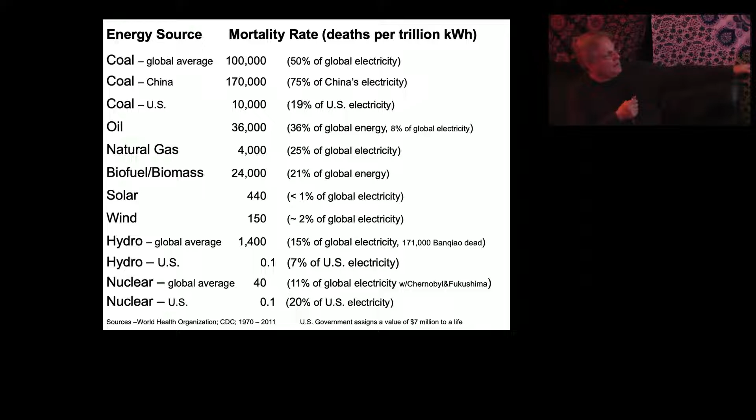In 1975, the Banqiao Dam failure killed 170,000 Chinese. I mean, that's a big deal. Doesn't happen here. And then nuclear, of course, NRC. NRC is the single most strict regulatory body in the world on anything. They will shut nuclear plants down for using the wrong color ink. I'm not kidding. You're supposed to use black ink, not blue. Not blue, black.

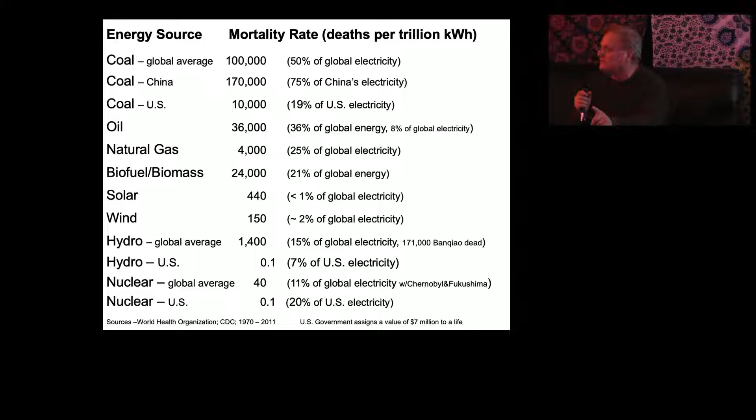Oh, we gotta stop. Okay, I was gonna say, what kills you? What kills people in America? What's iatrogenic? Medicine gone wrong. So nuclear, hey, one guy fell off, I think it was at Browns Ferry, broke his neck, fell off a scaffolding. Okay, great, wonderful. But why are we still killing 25,000 people with hamburgers? I mean, come on, this is absurd.

So why are you so afraid of nuclear? Someone gave me grief recently, a biostatistician. Because, turn me off. Yes. Someone died at Three Mile Island. He was hit by a truck. Yeah, he was hit by a truck.

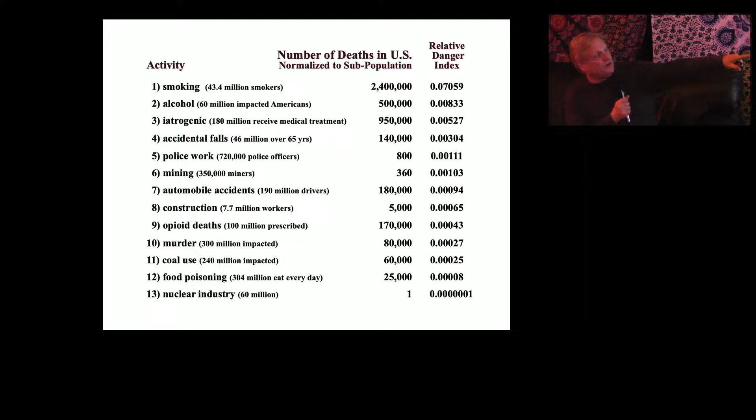And of course, Fukushima, three guys died, but they were swept out to sea by the tsunami, so it had nothing to do with Fukushima. No one's died from Fukushima, no one ever will. There wasn't enough dose to anyone. Okay, so, yeah, it's nice to know that eating is only slightly more dangerous than nuclear power now. That's great.

Questions? What time is it? It's 8:30.

You've done a great talk today. Thanks. But it's kind of a bleak future, because I think a lot of us know deep down that those curves you showed earlier about 2012, 2020, 2025, we're not going to beat any of them going forward. Do you think that maybe nuclear can have a role in climate mitigation in the future, as opposed to avoiding an outcome, maybe making the outcome not so bad?

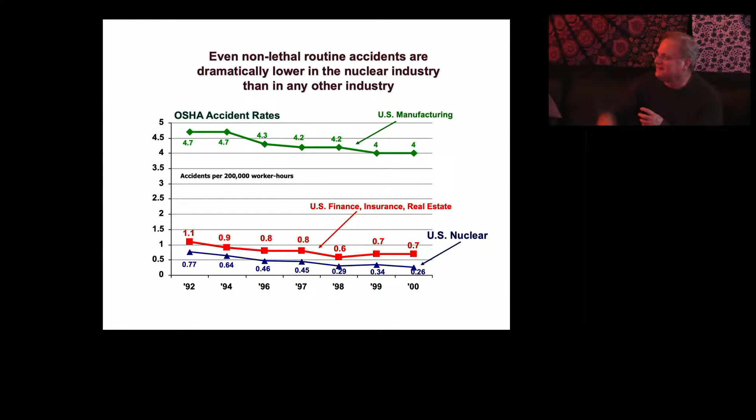Indeed, absolutely. And you need to come back. You need to get me back to talk about Plan B. Do we have a Plan B? Yes, we do. You're not going to like it, but we got a Plan B. It's called solar geoengineering. Good stuff. Good crowd. Thank you.